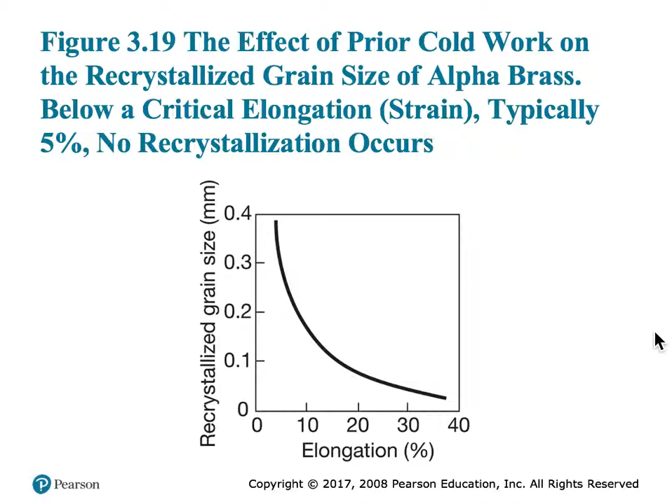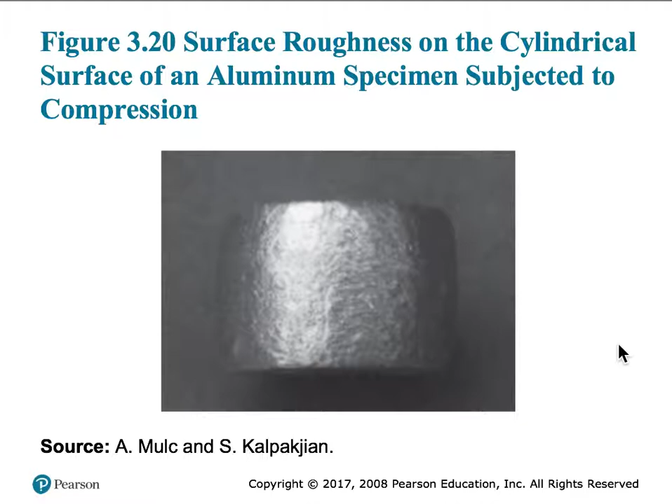What you may also find is that if you are doing certain deformation processes, it can lead to some amount of surface roughness on the sample surfaces when it is exposed to some kind of compressive forces. For example, you see here the surface roughness on the cylindrical surface of an aluminum sample exposed to compression.

As I said, the typical differentiation between hot working and cold working is approximately half the melting point in degrees absolute.

This textbook claims that cold working is only if it is less than 0.3, warm working is between 0.3 to 0.5, and hot working is above 0.6 melting point in degrees absolute.

But typical numbers are half the melting point in degrees absolute. This is the same temperature which takes into account the creep processes that can happen in a more accelerated fashion if you go above that temperature. So T is the operating temperature and Tm is the melting point.

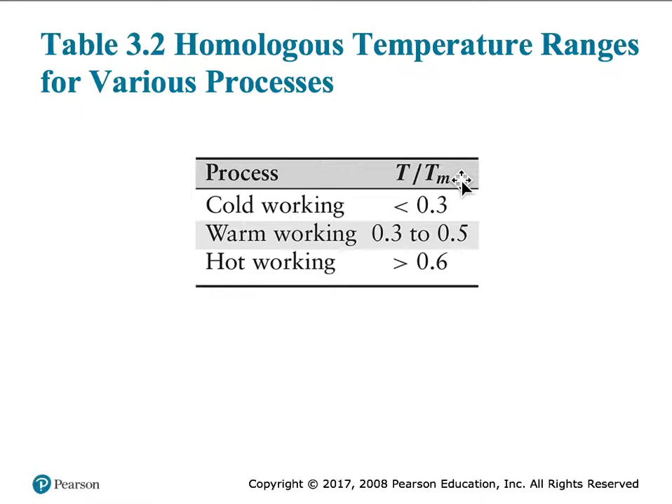So what happens when you are doing a tensile testing of a ductile sample? If you have a ductile sample and you apply a tensile load, it will typically neck before fracturing.

But if you do a compressive force on it, what you will probably see is that there is some amount of buckling that will happen during the compressive load.

But if you have brittle materials, what happens is that if you apply a compressive load, they do not exactly break in the center. They might break in multiple pieces.

What you will also find is that if you are applying compression on a ductile sample, before fracture happens, these materials can actually do some barreling, expansion on the sides. You might also find cracks in the middle of the sample before it starts crumbling.

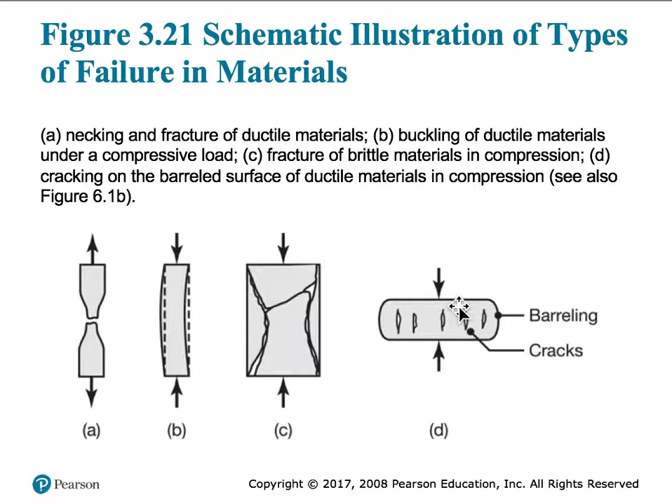If you are doing what is called upsetting - applying compressive force - and if it does not do the barreling, just the compression by which it expands in a very uniform manner, it is called upsetting. This happens without any friction at the die-workpiece interfaces.

If there is barreling, it's because there is too much friction force, which can introduce some amount of barreling on the sample. This happens more the more ductile the material is, because it makes it easier for the sample to deform by the barreling process.

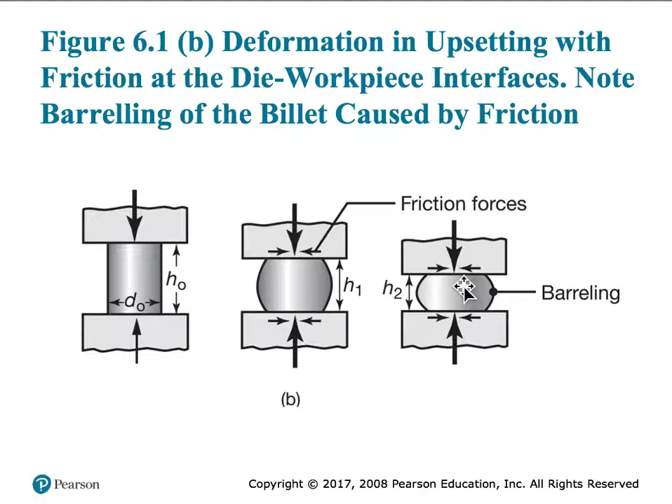So what are the different types of fracture that can happen if you are applying a tensile load? If you have a polycrystalline metal, it can fracture in the middle with very little ductility.

If you have a ductile single crystal material, it can fracture by some amount of shear failure happening in the middle of the sample.

If you have a polycrystalline metal which is very ductile, it will fracture differently. First, it starts creating some amount of voids during the tensile failure process, and they will all start joining in, start necking, and fail. This will happen if the material is extremely ductile.

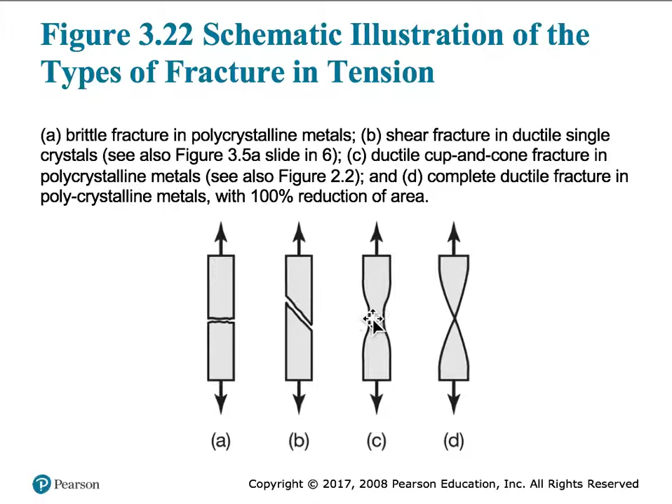For example, if you have gold, silver, or copper, they will all fail in this manner. But if you have iron or something like that, it might fail in this manner or in this manner.

Different materials will deform in different manners. For example, in the case of low carbon steel, if you look at the fracture surface, you will see a lot of dimples, formed during the failure process. They start linking up, and as the material detaches from one side to the other, the sample is held together only at the edges of these dimples, which no longer can take the load. Beyond a certain limit those dimples start detaching and failing.

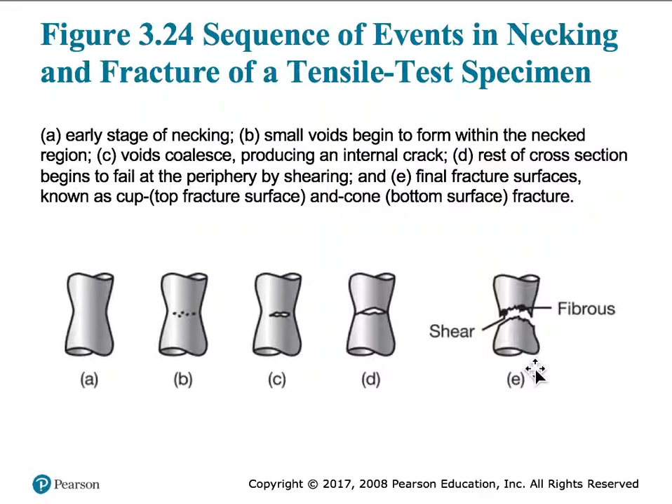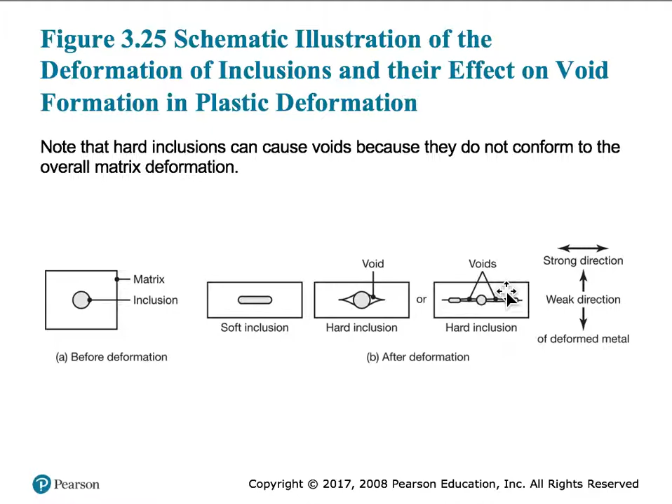Now, we also talked about ductile to brittle transition temperatures. So what is the correlation between the ductile to brittle transition temperature and a manufacturing process?

If you are below the transition temperature, that means the material is brittle. So if you are trying to manufacture a component, you try to be above this temperature, because otherwise the material is going to fail in a brittle manner, in a non-predictable manner, and you do not want that. So if your material has a clear ductile to brittle transition temperature, you want to be above that temperature in order to manufacture a component from that material. Does it make sense?

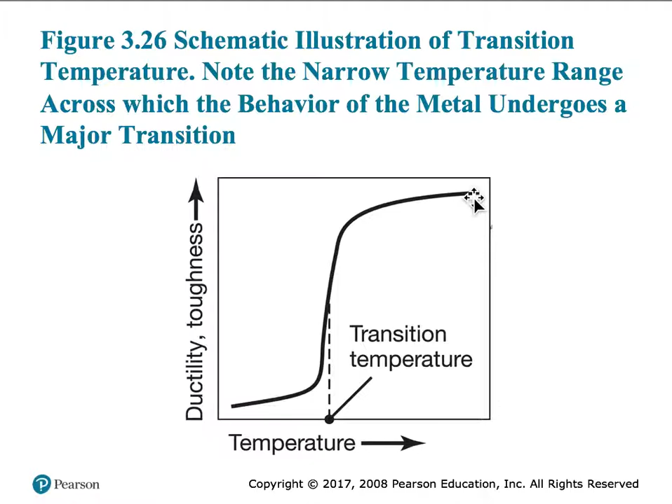So if you look at the fracture surface of a material that has failed in a brittle manner, how do you know whether it failed in a brittle manner or a ductile manner? If your fracture surface is bright and shiny, that means brittle failure. Dull and not shiny means ductile material. Also, if your fracture has very sharp edges and things like that, then it has failed in a brittle manner.

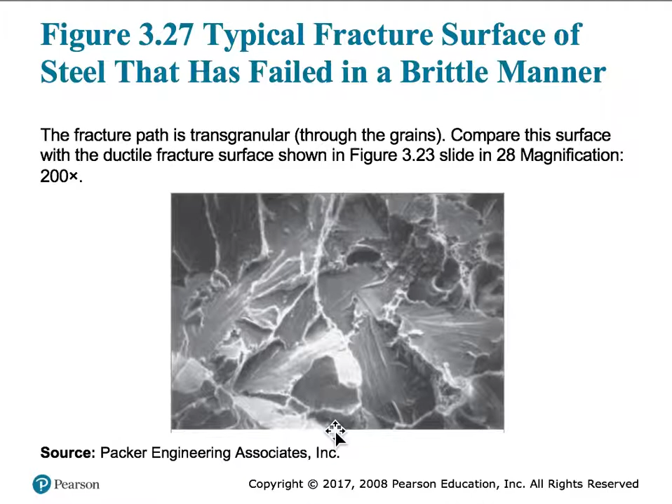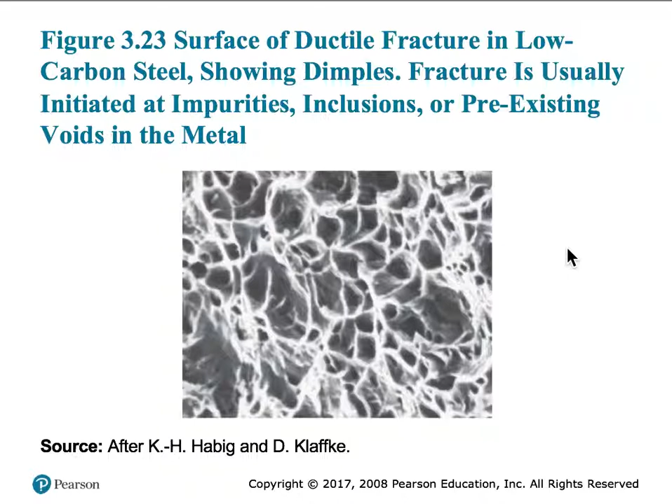So if you look at that, 3.23 in slide 28, this one in a low carbon steel has a lot of dimples and things like that, which means it has failed in a ductile manner.

So the process by which a material fails in a brittle manner is called intergranular failure. If the grains are giving way with respect to each other on each side, that means it can fail in a brittle manner. If it extends before it fails, that means it is a ductile failure.

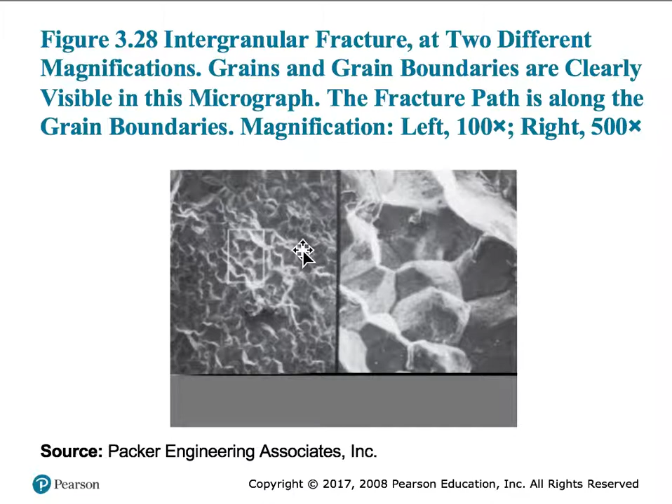So when you are trying to deform a material, what type of failure would you like to have? What type of deformation would you like to have? You would like to have a ductile deformation. You do not want the material to start deforming in the brittle regime. Does it make sense? Okay.

So when you are trying to design your components, for those of you who have done senior design and things like that, you have to take into account how the material will behave, how the material will deform.

When you apply a normal load, it is called the mode 1 type of failure. If you try to shear the material, or if you try to push the failure areas against each other, that is called mode 2 type of failure, and the other one is a tearing type of failure, which is mode 3.

So among all these three, which one will show the least amount of load required for failure? Obviously mode 1. Which means that this failure load is taken into account for your design purposes, because this shows the lowest strength. So you would also like to deform the material in mode 1, but sometimes you will not be able to.

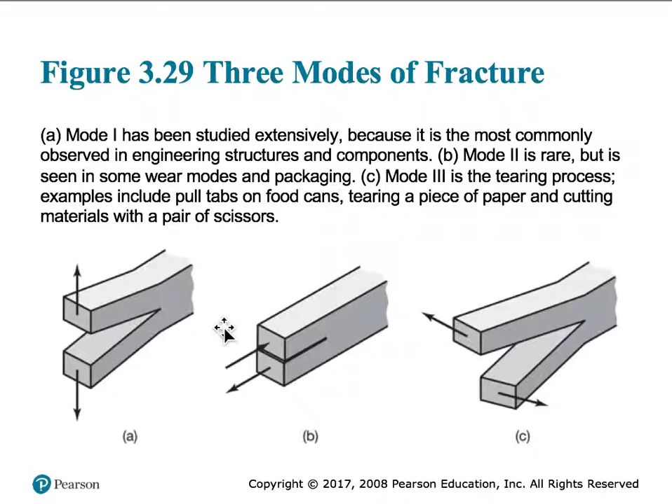The way you make the component, you may need to do shear deformation or mode 2 type of deformation. But this one shows the lowest load for the deformation or even the failure.

So why are we trying to do all this? Where does all this play a role in the failure of a material? Depending upon the strength of a material, when it is in service, it can withstand a certain amount of load only, especially if the load is continuous and repetitive.

Continuous repetitive loading is called fatigue loading. So if you have the wing structure of an aircraft, going up and down, that would be considered a fatigue type of failure.

Take the example of a baseball pitcher. The pitcher is throwing the ball, rotating the arm and throwing the ball, so they are applying a fatigue load to their shoulder. Similarly, components are applying a fatigue load to metallic type of components. It can happen in the case of ceramics also, or a composite also.

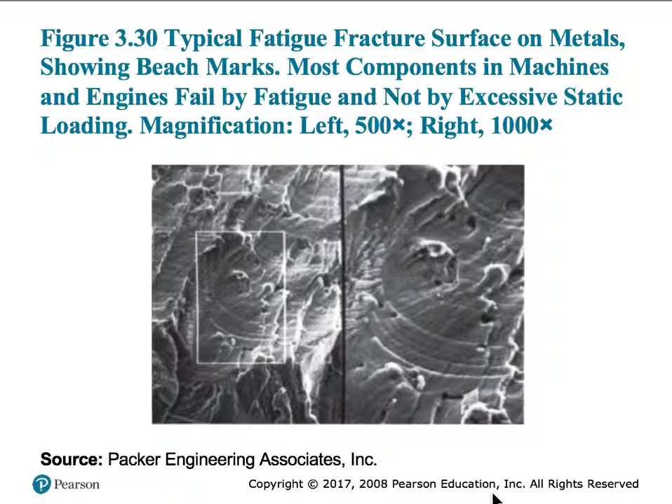If you look at it from the top, you will see these kinds of repetitive markings that are approximately parallel to one another. Because they are found on a beach, this is called beach marks or striations. So if you see these kinds of markings, you can be almost certain that this component failed due to repetitive fatigue.

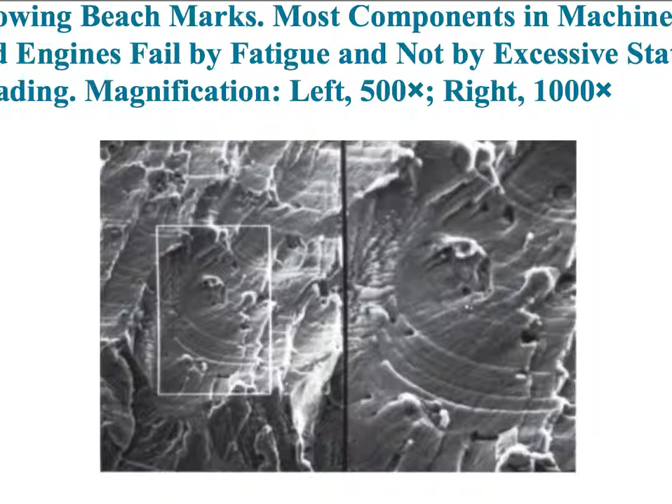And that fatigue can also be initiated on an impurity or something like that. I don't know what happened, I have to stop this and start all over again.